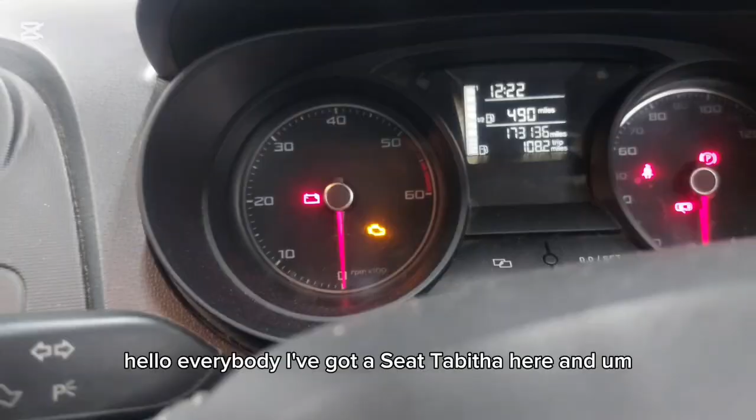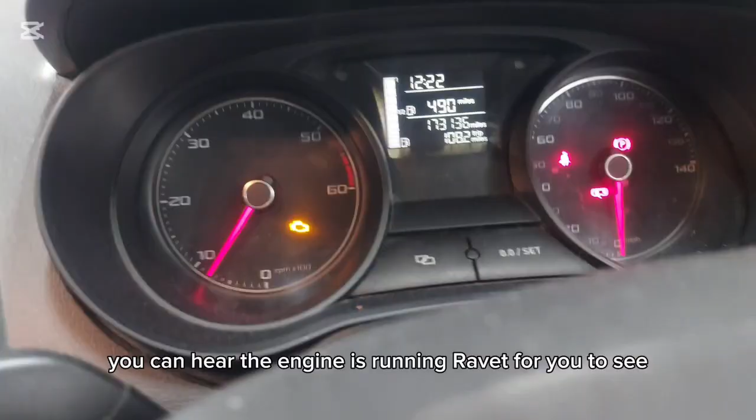Hello everybody, I've got a Seat Ibiza here, and as you can see, the engine management light is on. I will run the engine so that you can see. You can hear the engine is running. Rev it for you to see. Okay, engine management light is on.

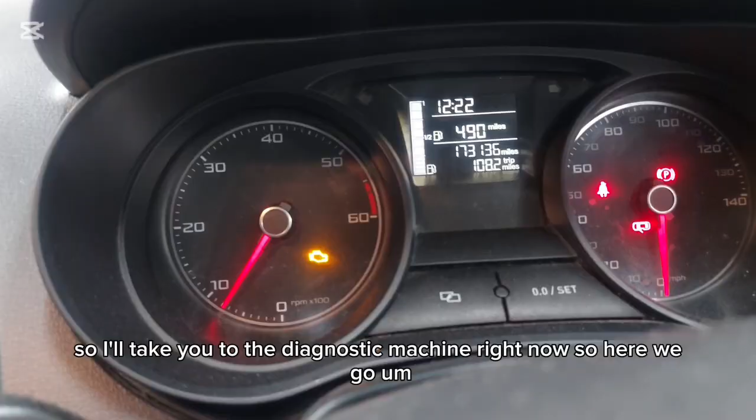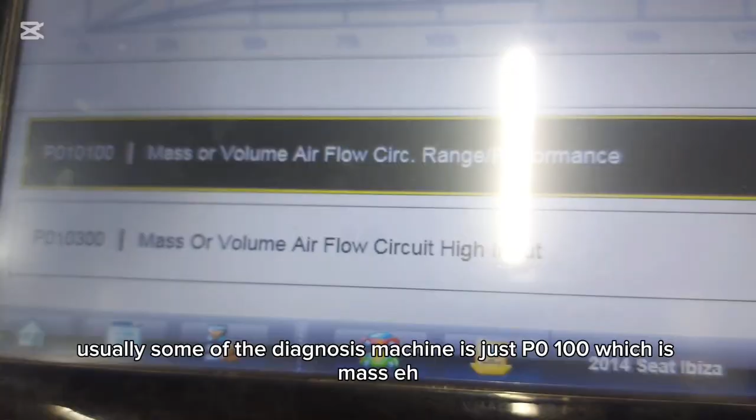So I want to investigate and show you what's wrong with this car. So I'll take you to the diagnostic machine right now. So here we go. I've just brought up codes here. We've got a P010100. Usually on some of the diagnostic machines it's just P0100, which is mass air volume. Okay, and then we've got a P010300, mass or volume airflow high input.

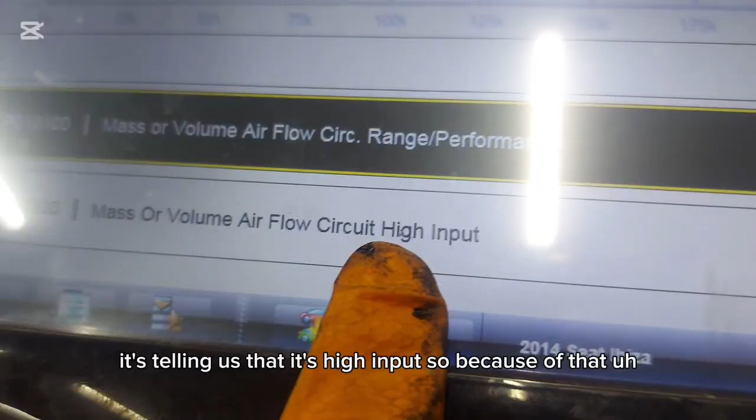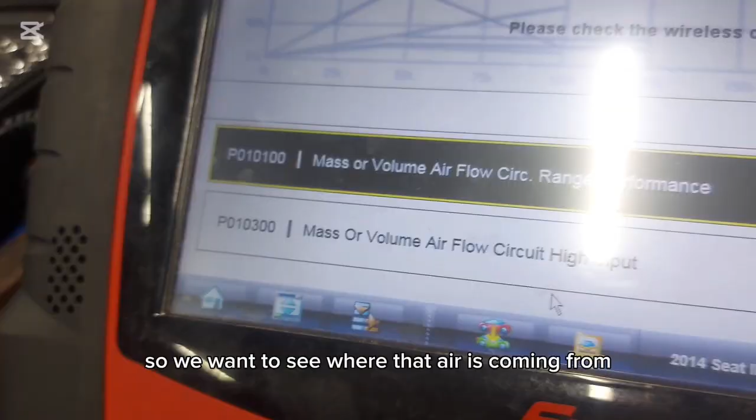So this one is giving us a clue. It's telling us that it's a high input. So because of that, it's suggesting to me that there's extra air coming in that we should not be getting. So we want to see where that air is coming from. But in the meantime, I will take you back. Forgive me here, I'm videoing this and I'm talking to you as well.

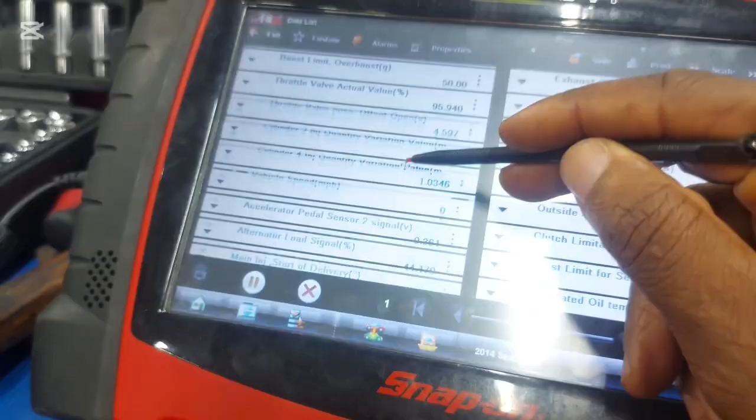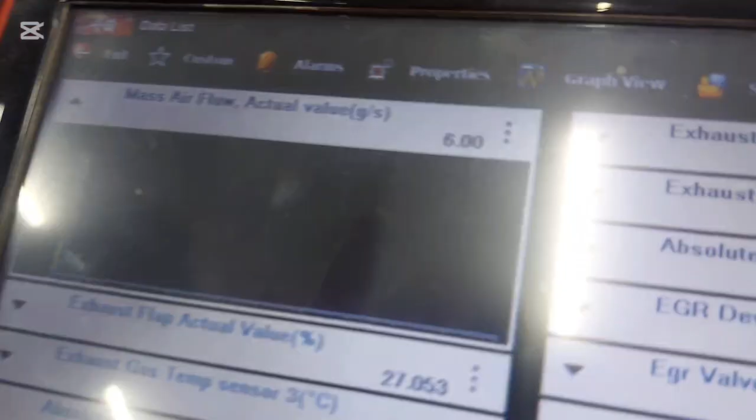So I want to go to data. Let me show you something here when it comes to live data. Since we said it's an air mass meter, I'll take you to the mass airflow. That's what I'm looking for. There it is there. Okay, so you look at this number there. I've got 6 grams per second.

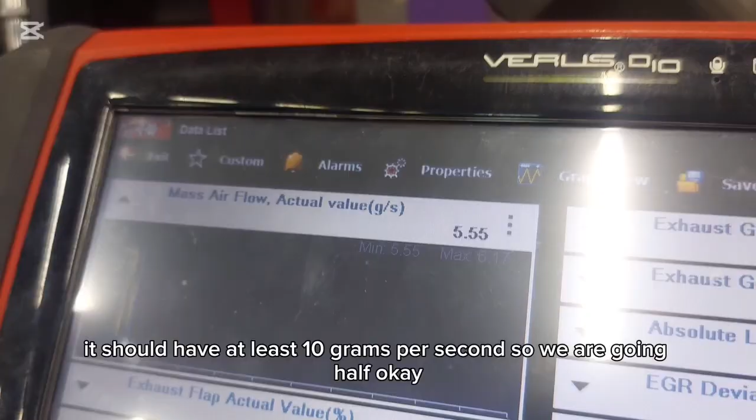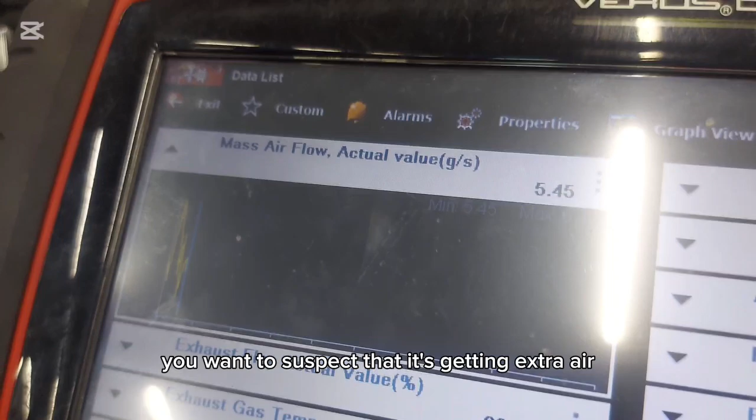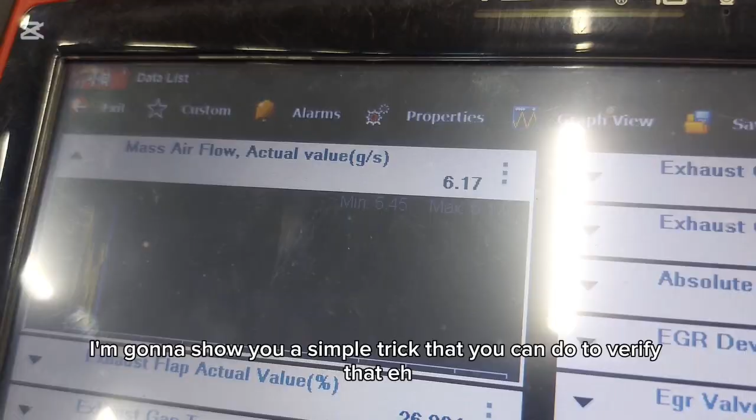This is a 1.6 engine. It should have at least 10 grams per second. So we are going half. Normally whenever you see the air mass meter going half, you want to suspect that it's getting extra air, especially from the EGR valve. So I'm going to show you a simple trick that you can do to verify that this is the case. So I'll take you to the car.

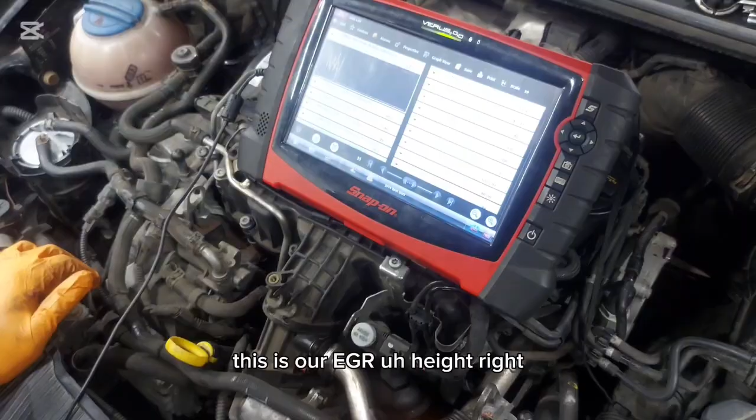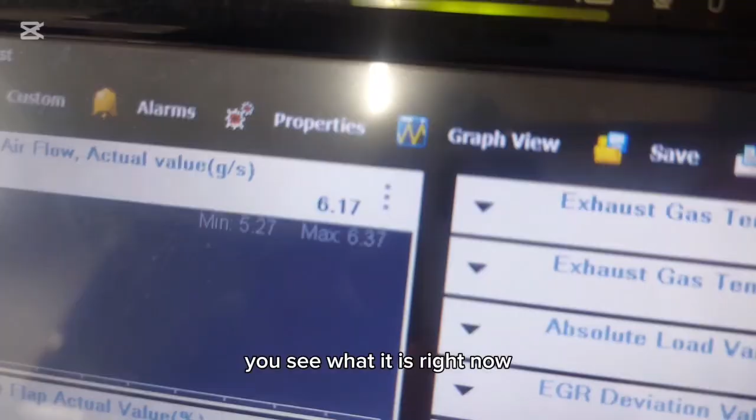Right, I'm right in front of the engine here. This is our EGR pipe, right? That sends gases back into the intake. So I'm going to take this one out. I want you to watch that number there. You see what it is right now, it's around 6. So what I've done is I've just loosened that pipe, and I'm going to put my hand in here to cover.

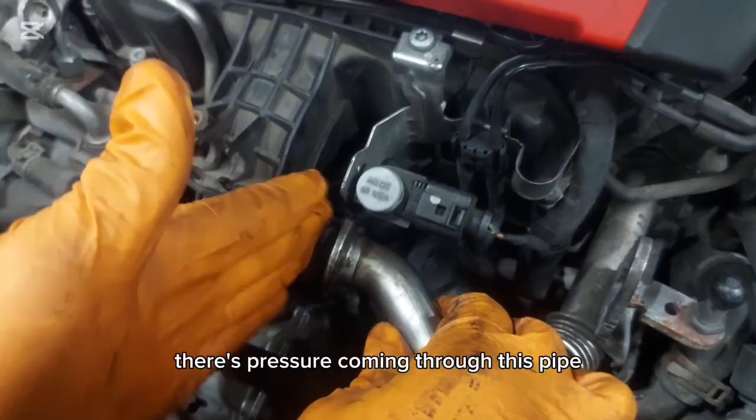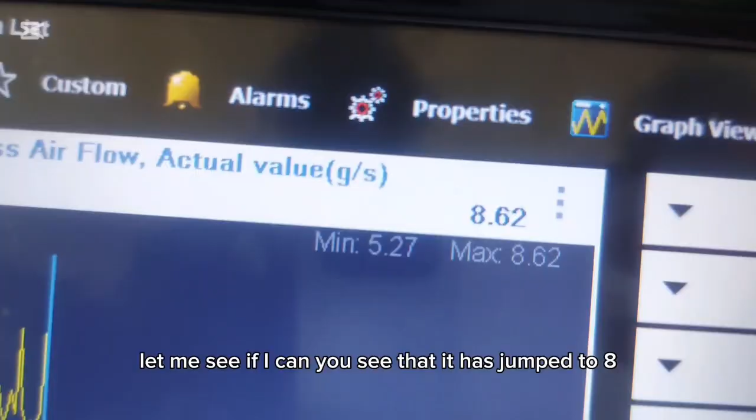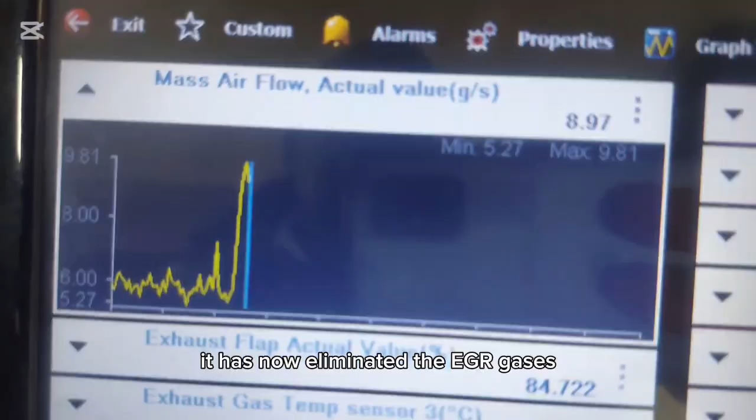When I go like that, I can feel that there is pressure already. Listen to the change in sound. There is pressure coming through this pipe, which there should not be. So watch this number now. You see that it has jumped to 8, 9. So that proves that now the air mass meter is working on its own. It has now eliminated the EGR gases, and the engine is now just relying on what is coming through the air mass meter.

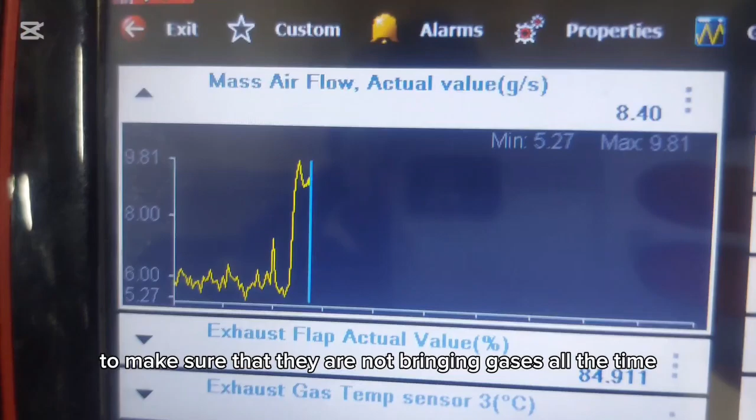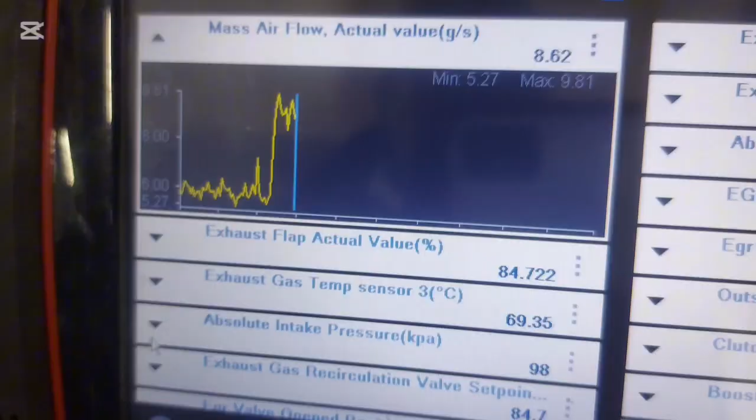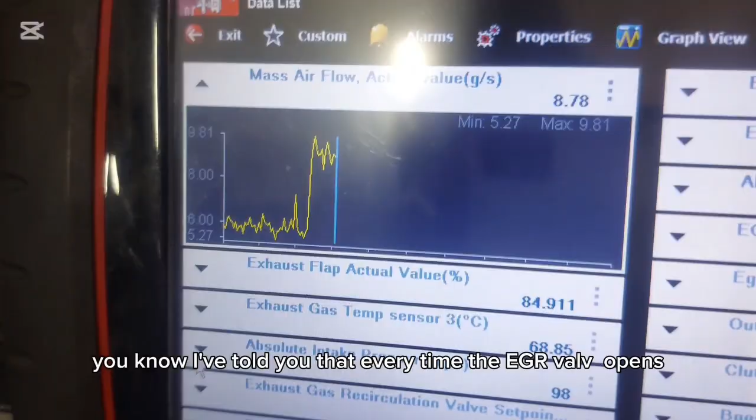So this is how you test these Volkswagen engines to make sure that they are not bringing gases all the time. So what is the problem? The issue that we have here is this EGR valve that is stuck open, which is letting gases go to the engine all the time. To some of you, my subscribers, I've told you that every time the EGR valve opens, the air mass meter will cut by half. So where it should be 10, it goes to 5, sometimes 6.

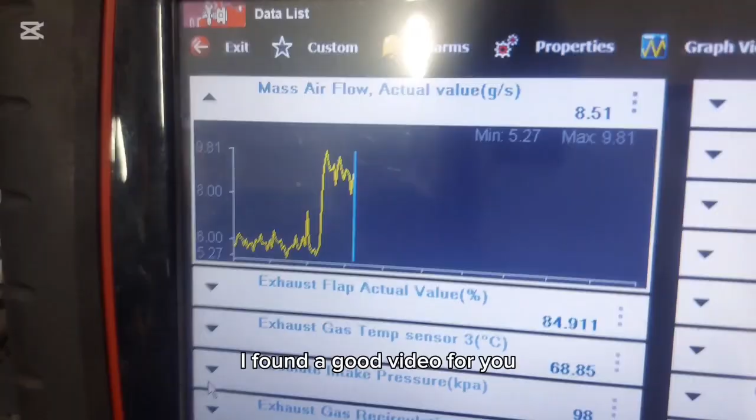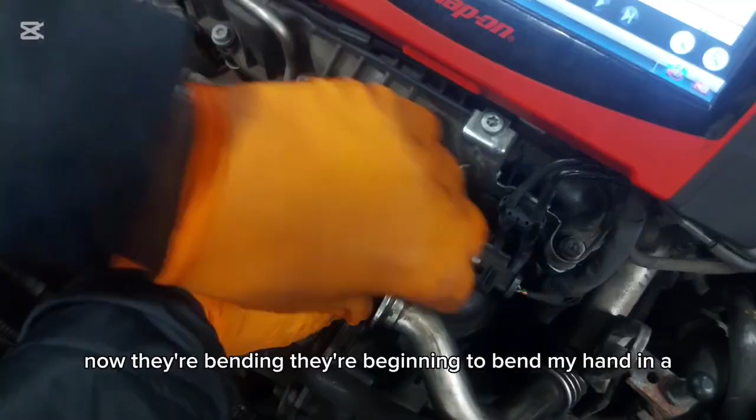Okay, so I have proved it today. I found a good video for you. So this is how. Don't just throw away an air mass meter. Don't go and get another. It's actually burning my hand right now. The gases are that hot. They're beginning to burn my hand in the glove. So I'll have to take my hand out. Watch what happens when I connect this. Look at that number there. See that?

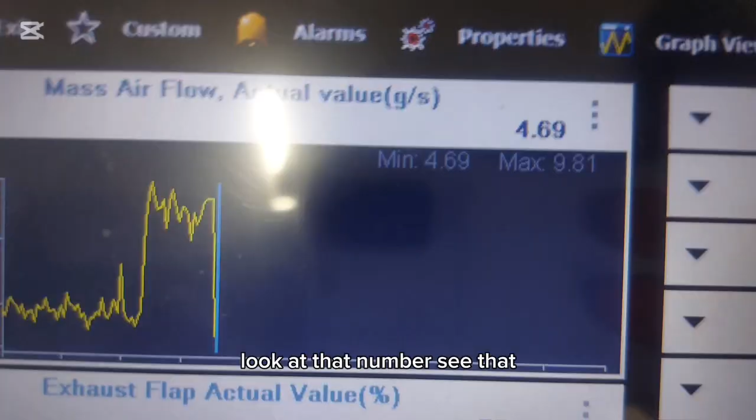We'll try and zoom for you. There you go. Perfect. This is the effect of a stuck open EGR valve.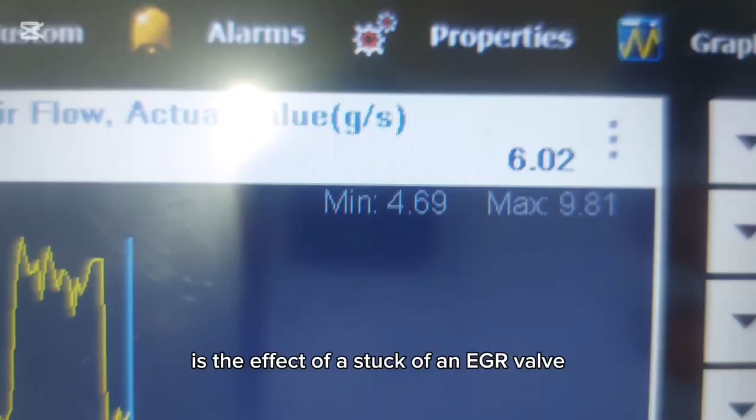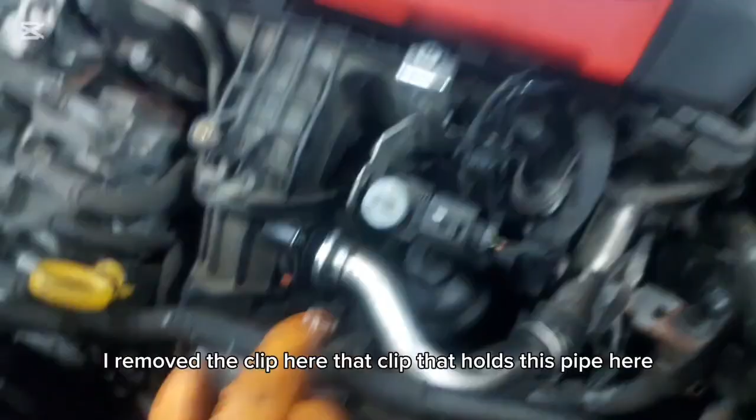So when you look to diagnose an EGR valve, this is the simple trick that you do. I'll show you. I removed the clip here, that clip that holds this pipe here. And as well, you need a T30 Torx screwdriver. Can someone give me a light, please? Where's the wheel light?

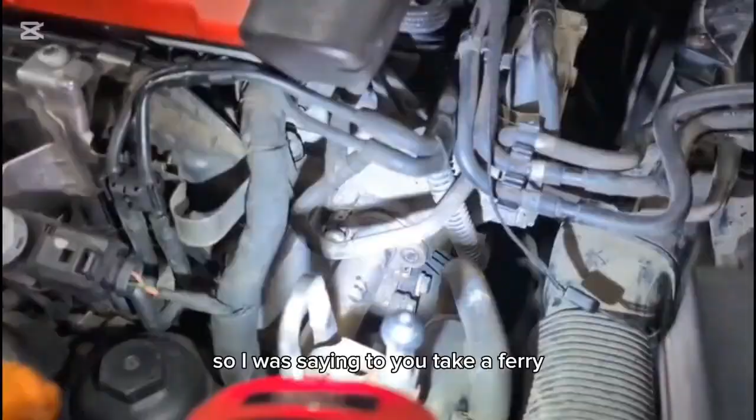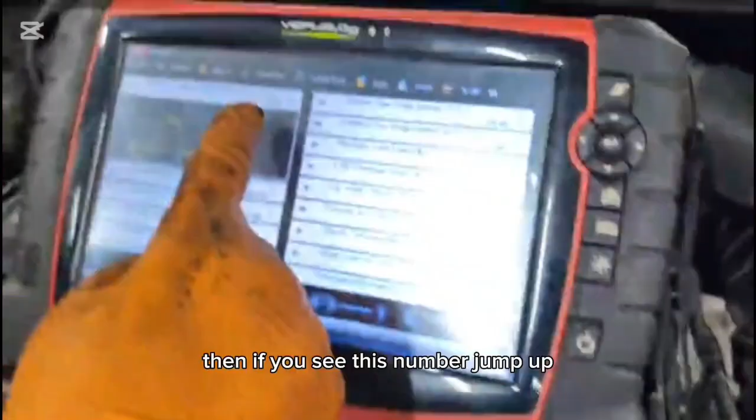So I was saying to you, take a T30, loosen these two screws here, so that you'll be able to move this one forward and put whatever you want here, it's up to you, as long as you can close that. Okay, then if you see this number go up, then you know that you have an issue with the EGR valve.

So I'm just going to tell my colleague here, I'm fixing this car at work, there's an option. Either we put a blanking plate there, but if we put a blanking plate there, I suspect that the engine management light will stay on all the time, or we have to change the EGR valve. So it is up to the owner of the vehicle.

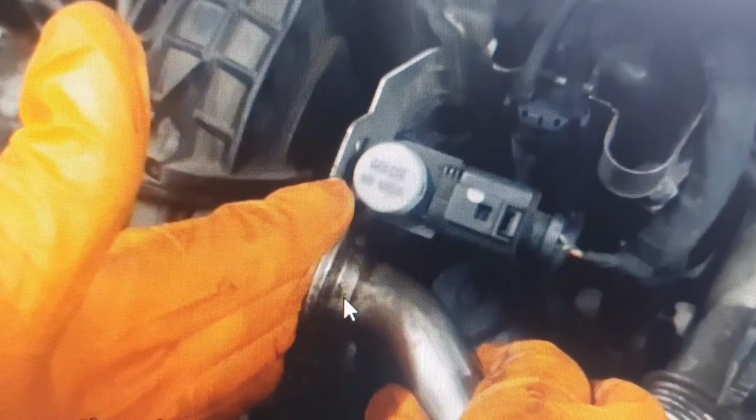I can confirm that I spoke to the owner of the vehicle and asked him to pick his choice on whether to fit an EGR valve or to put a blanking plate. So he chose to put the blanking plate. And after putting the blanking plate, I was worried, is the blanking plate going to cause the light to constantly stay on? But what I actually found out was that the blanking plate did not cause the light to come on. It actually extinguished the light.

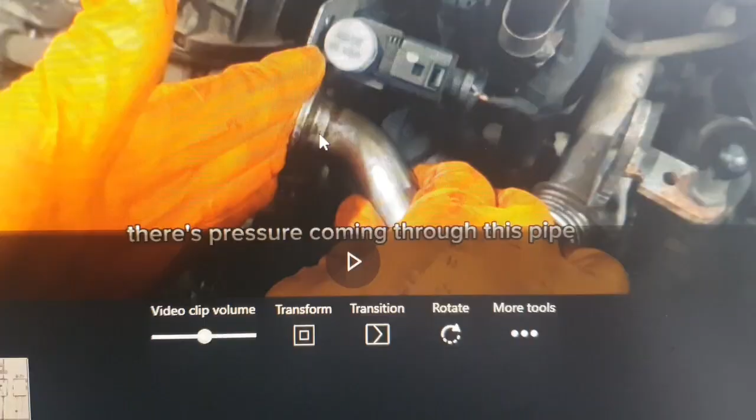So which side do you put the blanking plate? It is the side that is on the block, that silver pipe that my hands are holding. You follow it to the block. That is this side. Follow it onto the block, two screws there or two bolts. Take them out, and you can put a blanking plate there. Make sure that it's thick enough not to be damaged by the pressure that is coming from the EGR valve. And so after that, the light just went out, so there was no issue. My fears were alleviated in that respect.

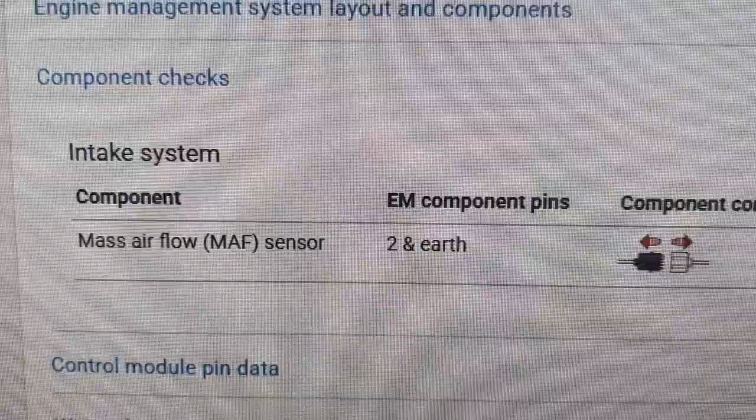I thought maybe before I close this video, I'll take you to Autodata and just show you how they encourage you and me to check the mass airflow. As you can see, I've got the Seat here, 1.6. It's a 2014, and this is what they tell you and me to do. They say check mass airflow sensor, pin 2 and ground. All right. They say check these two pins.

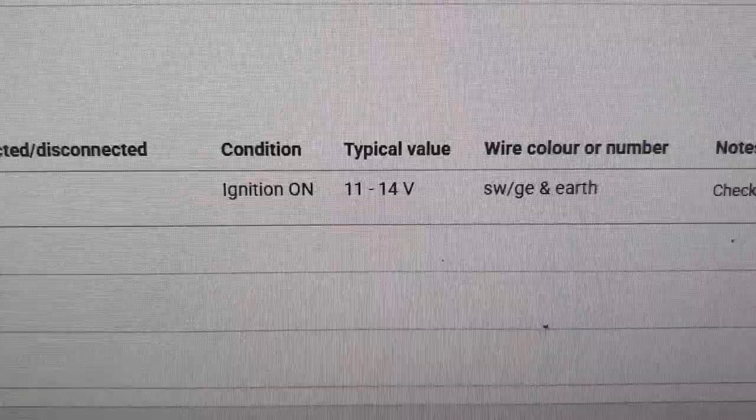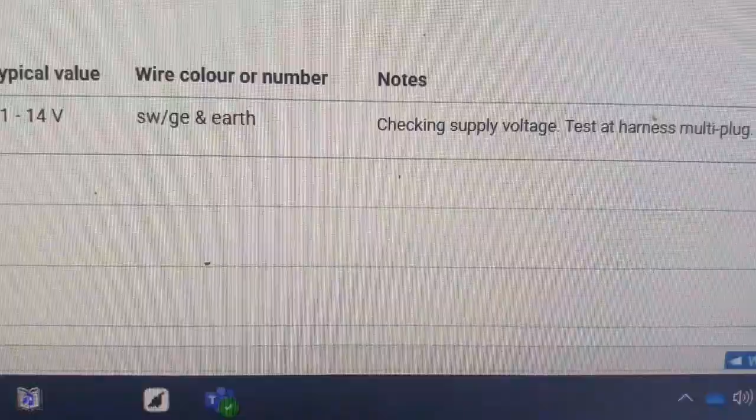Ignition should be on, and you'll get 11 to 14 volts. They give you the colors of the wires, SW, which is black, and GE, which is yellow, and then they just say, and earth, you can go to the battery. So they'll tell you that if you don't get what you are looking for here, which is a voltage, check supply voltage, test the harness multiplug.

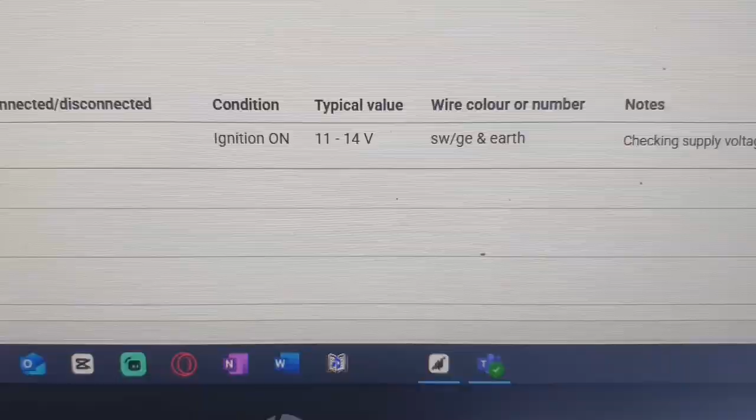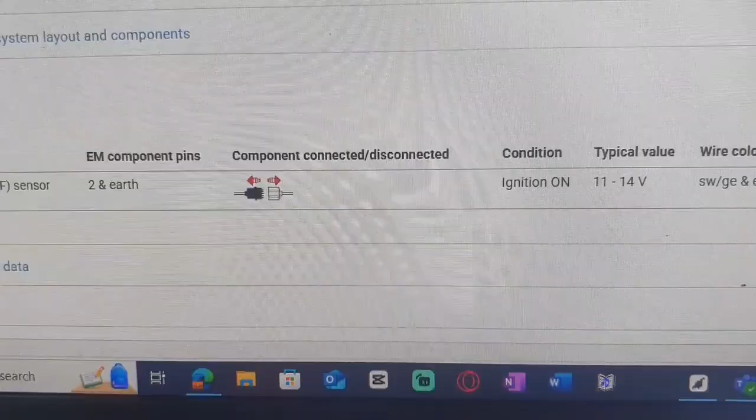Guys, checking power, if you go and check power on this thing, you are going to get it. Okay, you get the power, but would that solve your problem? That's my question. It doesn't. It does not solve the question.

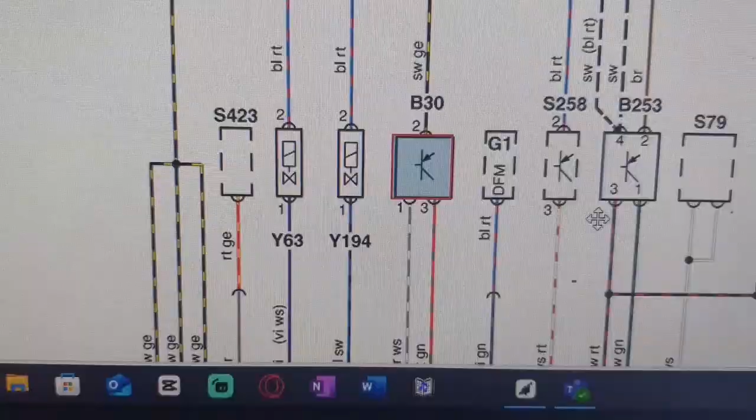Solve the problem. So let me take you to the wiring diagram and just show you here, in case someone will be working on this car, you can make use of this wiring diagram. So here is a wiring diagram. That's B30 here. That's our air mass meter. And let me bring this up here.

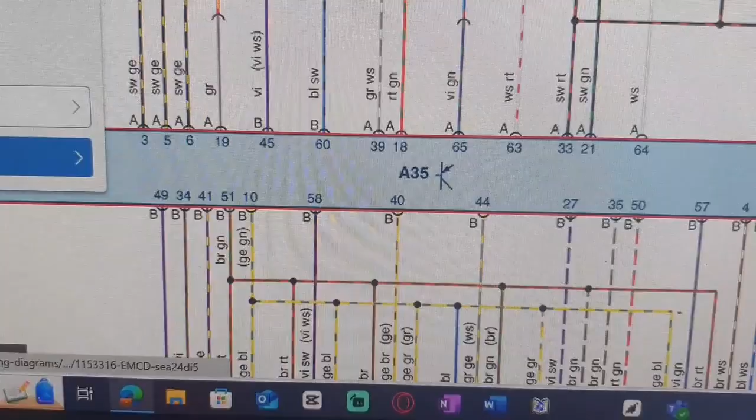As you can see, pin number 1 goes to plug A. Maybe let me see if I can help here. Does it have... no, it's not showing us. Let me see. No, it doesn't show actually. Sometimes they do show you how many plugs you have. So here we've got plug A and there's plug B. As you can see, there's B there. Let me see if there's plug C. So this is on the ECU. We just have 2 plugs, okay? A and B.

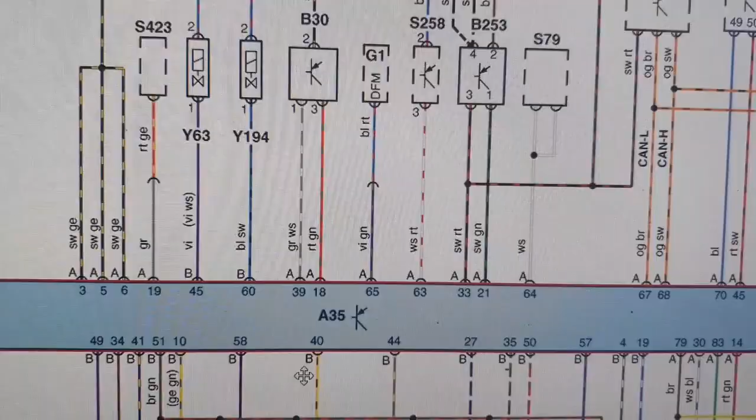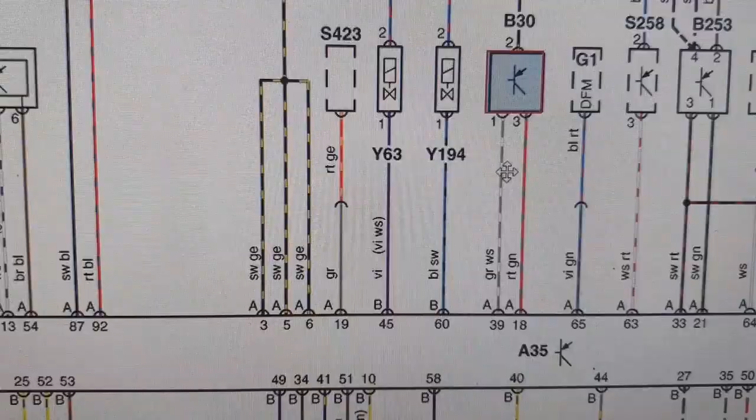So for the air mass meter, which is this one here, as you can see straight away, it brings the wee picture there. That's the air mass flow. So you go then to your pin 1 on the sensor, it is coming from pin 39 on the ECU, and in your pin 2, watch your pin 2. That's the one they told us to go pin 2 and ground. Why did they say that? Because pin 2 is fused. That's our power. Okay, that's battery voltage there.

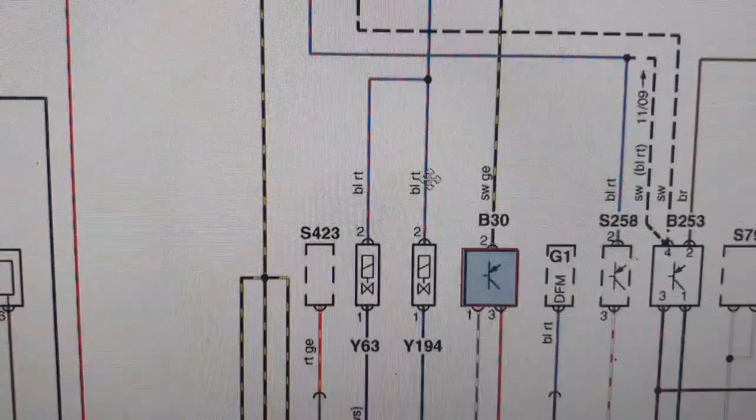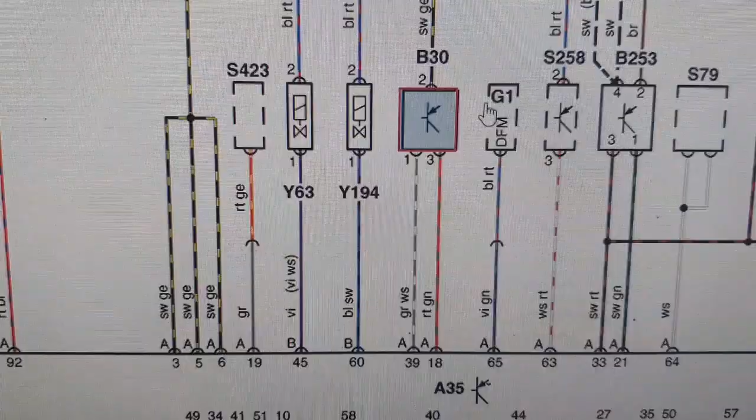And if we go to pin 3, then there's pin 3 there. Pin 3 goes to pin 18 on the ECU. And the colors, as you can see here, you've got gray and white, you've got red and green, and then you have got black and yellow up here. Okay, you see that? If you highlight it, it tells you what it is. Let me see if I can do it this side. Maybe it's not, but it's showing me on this one here. Okay, so that's the air mass meter.

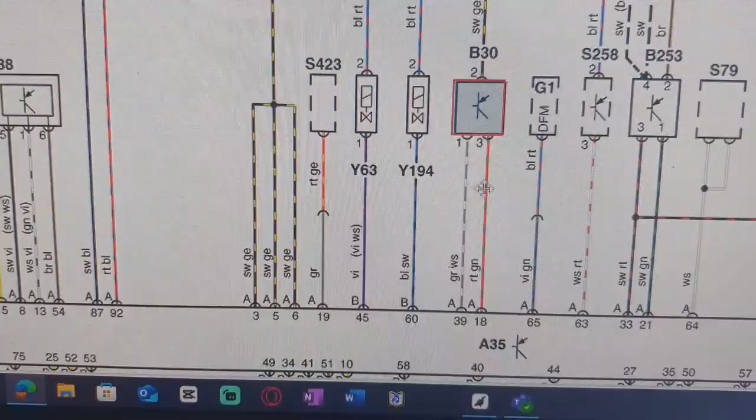Quickly, how does this thing work? You know, to some of my colleagues, some of the students who may not be aware of how this works, right? Inside this air mass meter, we have a resistor. Let me call it a resistor, or let's call it a hot wire. And that wire is kept at a constant temperature. So as the air flows in, the air cools down that wire. So as the wire cools down, the ECU ramps up the current to keep it constant. As more air comes in, it cools it down. The ECU is fighting that cooling down. It's ramping up the current.

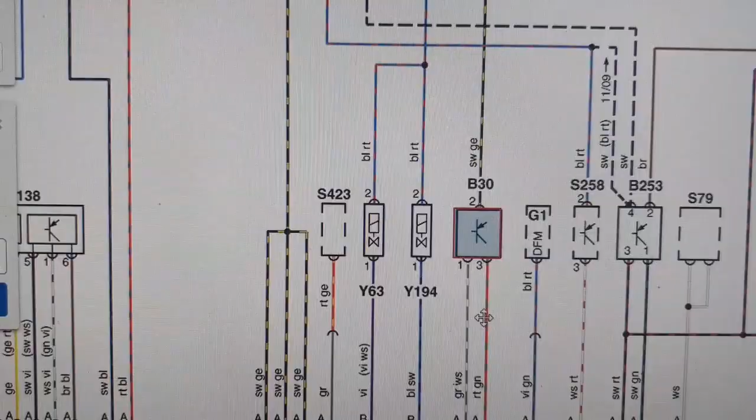So how does the ECU know how much air has come in? One of the ways that it knows, it will look at that current change. It knows straight away from calculating from the current. It will know exactly how much air is coming in.

Look, I hope you have enjoyed this video. I just thought, you know what, let me give you this bit here in case someone is working on this wee car and then you need to know what the wires are. Where is pin 3 going to? Where is pin 1? Which one is my power? So yeah, there you go.

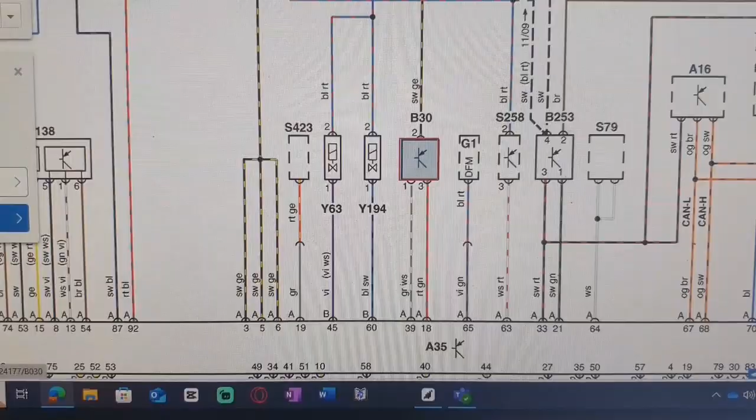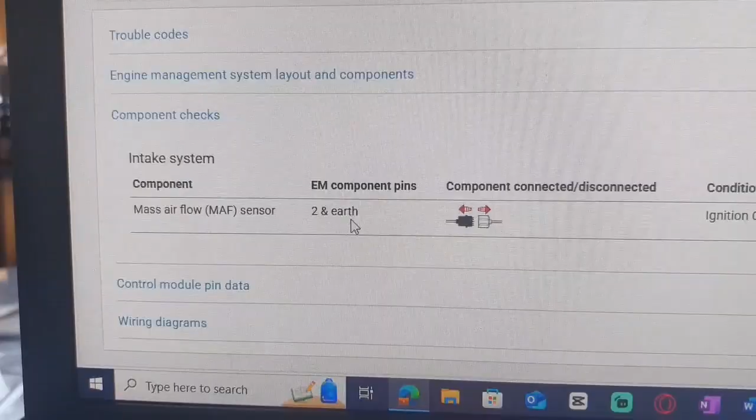And as you can see, when it comes to testing, it's not good. When it comes to checks, it is not good at all, because it just tells you go to pin 2 and ground. Yeah, then you get power. So does it mean then that it's working? I don't get it. So sometimes I think we need to put more here to help technicians, but some of this information doesn't always help. It's okay when you're looking for power. Let's say this thing is not powered and you're looking for power. Yeah, that's all right. If that wire is open, that's fine.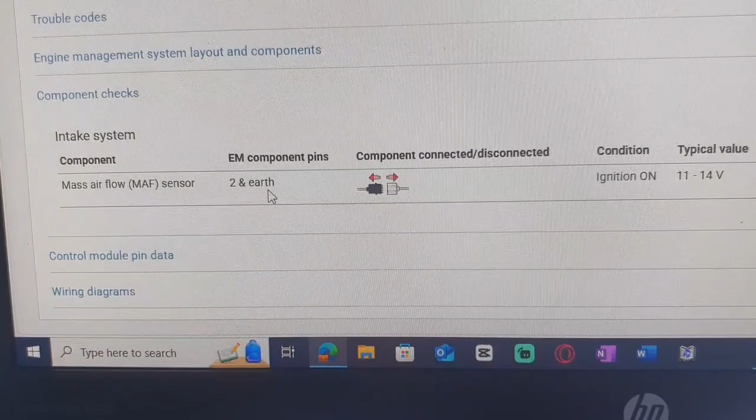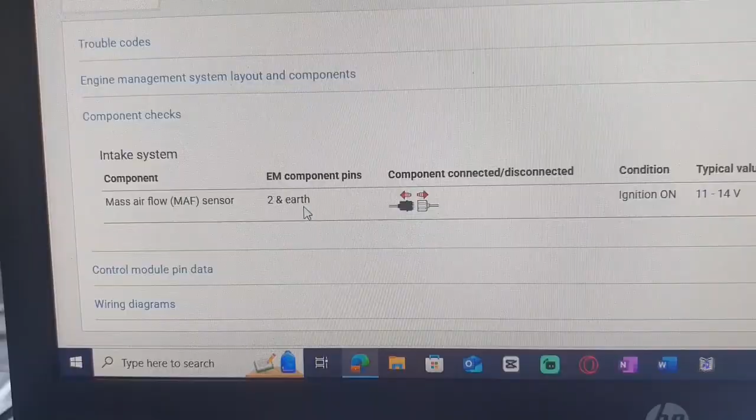But as to how it works, and what to expect, ours is dropping to half the voltage because it's getting additional air from the EGR valve. So the map inside knows straight away that the EGR valve is open, and then it takes away half of the air mass meter to accommodate what is coming from the EGR valve. That's what we have in this issue.